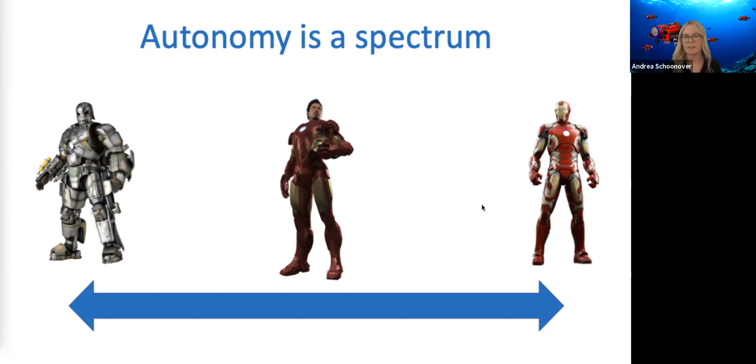If you take the leftmost suit and compare it to the rightmost suit, we could describe both of these robotic suits as having some level of autonomy, but they're across a spectrum representing that they're not capable of doing the same things on their own.

This begs the question: how do we give robots autonomy? First, we can look to ourselves to explore the ways in which we have autonomy. You and I, your teammates, we have autonomy because we have a brain to make decisions.

We also have eyes to help us see and ears to hear. We're able to take the knowledge we have about ourselves and about the systems that give us the capability to govern our own decisions, help us act, and give us capabilities on our own. We can explore other technologies that exist or need to be developed to help robots mimic these same functions.

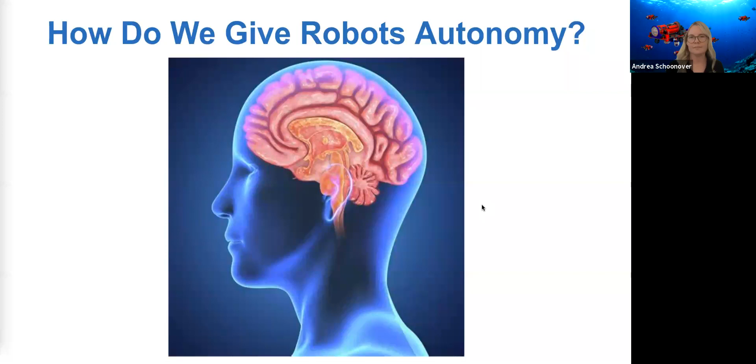If we want our robot to make decisions, we have to give it a brain, like shown on the right side of the screen. A robot uses a computer for its brain. The cerebellum is also part of our brain that helps us with posture and balance, just like a gyroscope would help a robot balance in the water.

So those are only some of the tools we use to give our submarine autonomy. The main point is that we can use sensors to help robots mimic human senses. Our sub is known as an AUV, an acronym for autonomous underwater vehicle. That means our robot is like a sub used in the water, not in the air or on the ground. When we put our robot into the water, we activate her program and she's able to navigate through the water by herself, without us having a controller.

Now, why do we care about underwater autonomy technology? Why does the world care, and why do we want to perfect it? People who are interested in these systems are rescue professionals, military, environmental conservationists, and explorers.

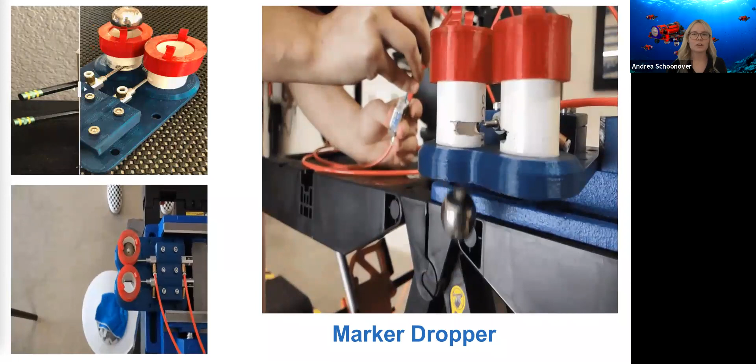When we design a new part for a robot, we go through a process similar to what you might have experienced in school or team projects. Before our official design is ready for our submarine, we first have to brainstorm the way we'd like to solve the problem at hand.

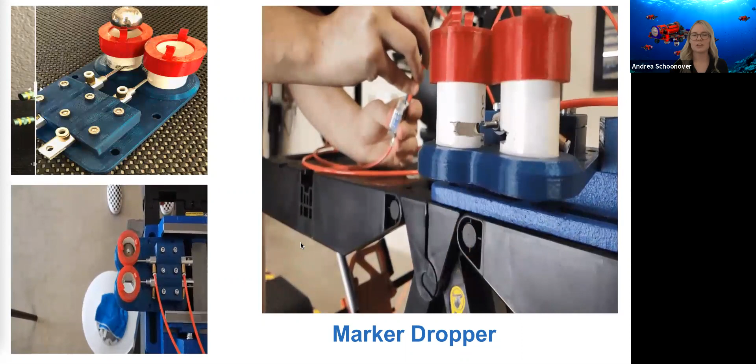After brainstorming, we find objects in our environment to create a prototype with. In this image, we've used a simple paper towel roll and pencils to prototype this marker dropper mechanism. Once we've created a prototype, before manufacturing, we like to come up with a version that's ready for testing.

For our purposes, that's actually a problem because we don't want the torpedo to float to the top as soon as it's released. We'd like it to travel in a straighter path so it glides through the water and reaches the target it's destined to hit.

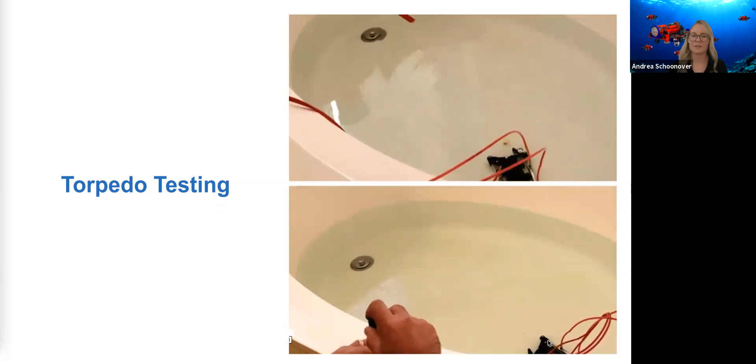Although our main focus is our technical project, Desert Wave is much more than that. We are role models for our community. We work with our little sister team, Da Geese of Freedom, a high school robotics team in the Chandler area.

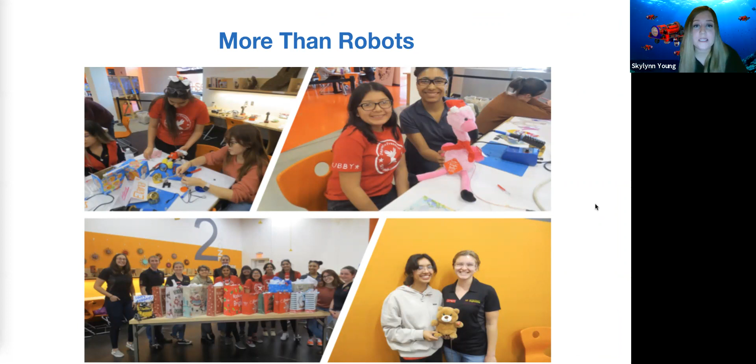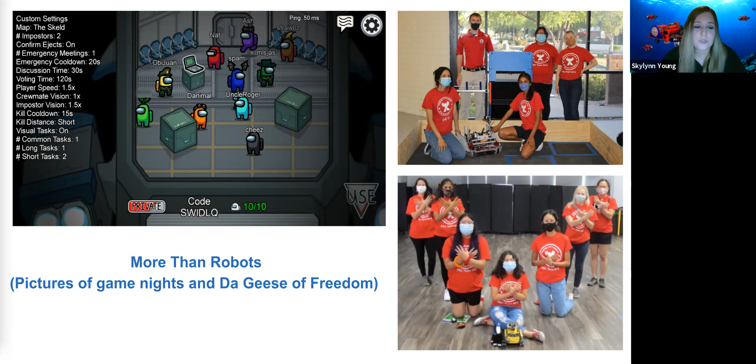As you can see in this slide, we have game nights, virtual game nights, where we come together and discuss our successes and love to share our stories with each other about our day.

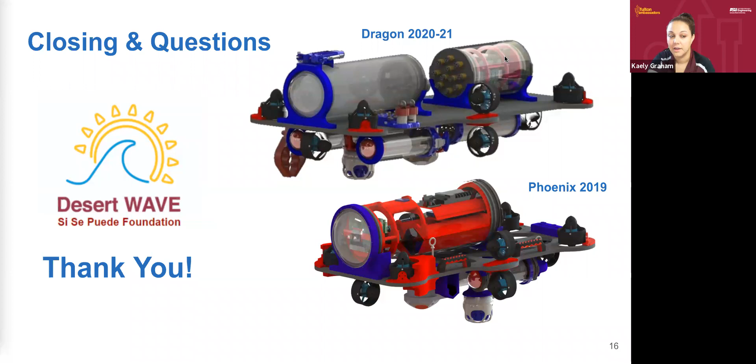Awesome. So there's some questions about the structure design of the robots. This first one asks: how much does it cost approximately to make one robot? And maybe you could talk about some of the tools or facilities you've used on campus to print, like 3D printing and things like that.

Yeah, that's a great question. It depends on the specifications you're trying to reach. This robot is quite expensive, but what really helps us bring the cost down is using processes like additive manufacturing or subtractive manufacturing, which is like 3D printing or using mills to take away pieces of the frame. Something we do that's very important within the engineering design process is that before you build, you try to create a prototype or use computer-aided programs to help create scale models of the things you'd like to produce.

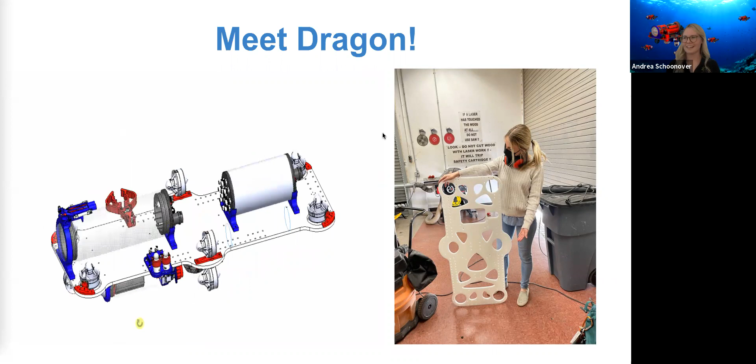If we can plan to the best of our ability what we'd like our robot to look like, as you can see on this computer program here, we can then take the material and use different machines available to us, like a CNC router. Actually, this frame is the frame for Dragon, and one of our new students was able to go down to the Innovation Hub on the Polytechnic campus, which is like a really awesome lab space filled with all of the great tools you could think of, and some I hadn't even heard of before, and get trained on how to use them.

This student was able to go down to the Polytechnic campus and use this incredible machine to essentially cut away the pieces from the material to create the design she had loaded in. We do similar things with all of these 3D printed pieces—we design it, and then we're able to use some of the machines to manufacture these pieces, so that we aren't having to order them from third-party companies. Designing some of these pieces in metal would change the weight of the robot, but also bring up the cost quite a lot.

Because we have access to 3D printers, we're able to use a material that's a bit more forgiving for students who are still in the learning process. So if we have to print this entire mechanism, or even just a small piece on it, it's not going to cost as much as it would to order it from someone who can manufacture it for us.

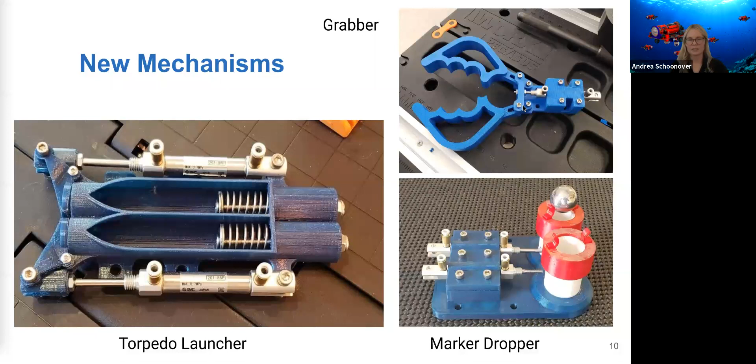I think that doesn't really answer your question on how much some of these pieces cost, but I'll give you an example. This Subsonus hydrophone array, these are hydrophones - it's what the robot uses to hear and communicate through signals underwater. A unit like this from a company can cost quite a lot, like I think this is $17,000, and maybe Dr. Frank can correct me, but we were very fortunate to have it donated to us, which helps with the cost.

However, using hydrophones isn't something brand new to this year. There's lots of research, tutorials, and resources that other people have documented from when they researched how to create a hydrophone. A robot like this is quite expensive for us, and we have two of them now, and we've been very successful with all these awesome sensors we have access to. However, just because you don't have the money or sponsorship to afford some of these pieces doesn't mean you can't create them yourselves - like this thruster. Off the shelf from a company, it could be a couple hundred dollars, but if you reverse engineer it and print some of the pieces yourself, it would bring down the cost quite a bit.

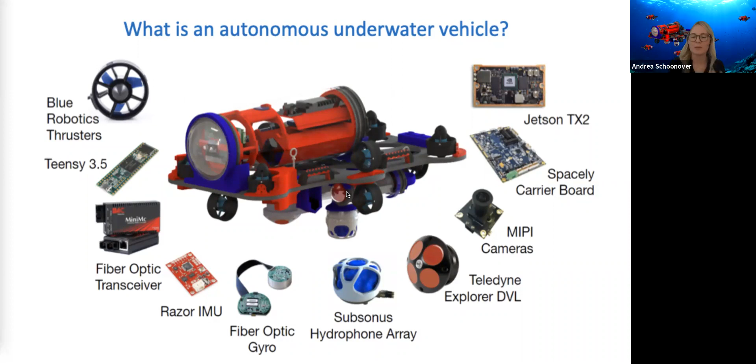I can answer that question. We use lithium batteries from a company called Blue Robotics. They actually sit right here - well, we don't have batteries on here right now, it's a power source. They're batteries that sit inside what we call battery pods, these acrylic tubes - maybe you can see it better here. They're 12 volt... I don't know, Dr. Frank, could you clarify that?

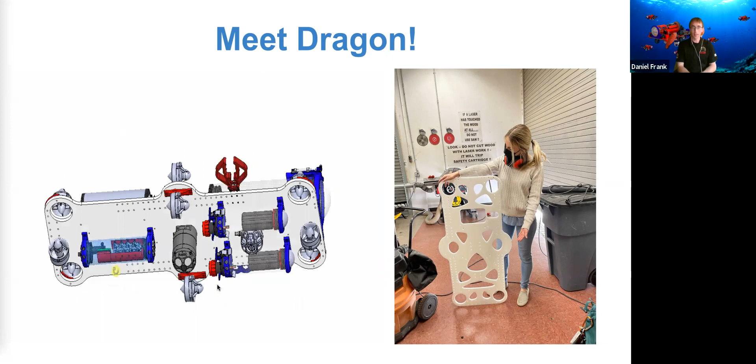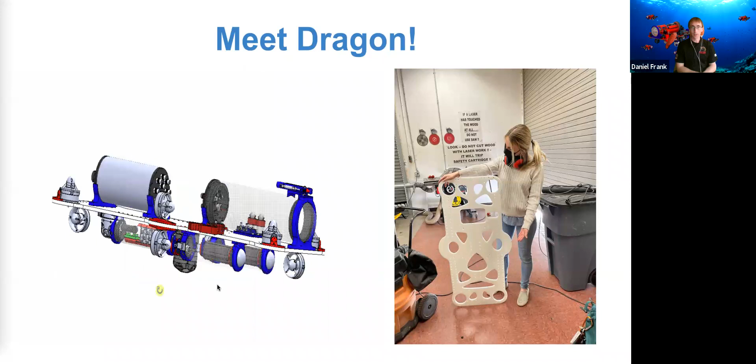Yeah, I think they might be 16 volt. They're lithium polymer. As far as how long they'll run, it depends what the robot's doing. Sometimes when testing, the robot just sits in the water staring at things, collecting data from the cameras, so it won't use a lot of power. But sometimes the submarine's driving all over the pool, going fast, doing turns, going up and down - if it's really active like that, probably about 20 to 30 minutes before we have to pull it in to change the batteries. But if we're just testing and it's sitting there for a while, usually 2 or 3 hours is good.

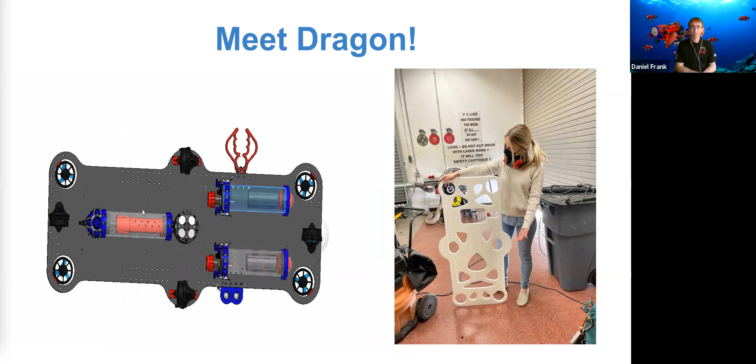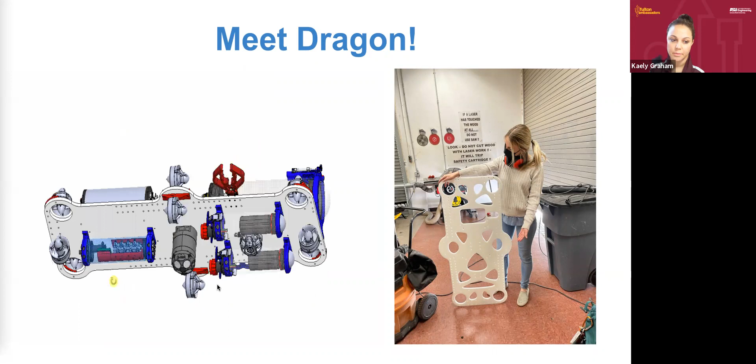There's another question asking, do you plan on using this vehicle, or could this robot or something similar be used to solve real world problems, and what type of applications could this have?

Just like what we were talking about for what AUVs are used for, this is the kind of thing we're researching, and it needs to start developing further so we can explore the ocean more. Only 5% of our ocean has actually been discovered today. When you work with AUVs, we're trying to improve search and rescue, mapping the seafloor, and underwater inspections. I was in the military, and a lot of naval divers actually use this or something like it. So it's very important not only for civilian life but for military life, for discoveries as well as protection.

Do we have any other questions? There's a comment saying this is so cool, and it is so cool. We're always so impressed with everything our students are doing. While we see if there are more questions coming in, I wanted to ask if you ladies wanted to give any advice. All these students have their competition coming up this weekend. As a competition team, do you have any advice for them as they're getting ready to compete in the National Science Olympiad?

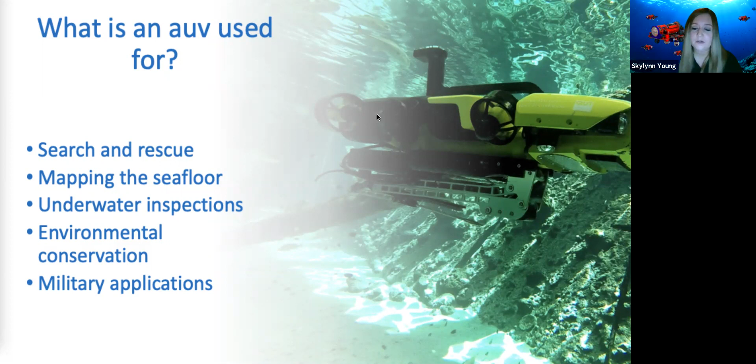I didn't get a lot of these opportunities that you guys are getting in middle school and high school. My school didn't have anything higher than a calculus class. We didn't have physics, we had nothing for engineering. So my advice is probably to do as much as you can and have fun. A lot of these opportunities will just help you excel in college. That hands-on experience is what you want, because you can learn math, you can learn science, you can learn it all, but until you do hands-on experience, you're not really going to understand what you're learning. That's my personal preference.

Awesome, we have a question. Oh sorry, Dan, do you have advice? Oh, go for it, Dr. Frank. Oh, yeah.

Skylynn, did you ever have an opportunity to do anything like they're doing with the Science Olympiad when you were in high school? No, the most we ever got was a math competition, maybe testing how much science we knew, but as far as anything you guys are doing, I never had that opportunity. I graduated in 2011, so that wasn't really open for me personally. That's definitely why I'm saying go out and do as much as you can, because this experience will help you throughout college. I didn't know I liked engineering until I went into the military and worked on diesel engines and gas turbines on a ship, and that's when I fell in love with it. So definitely take all the opportunities you can in middle school and high school.

And just adding to that, like Skylynn, you didn't have these opportunities.

Andrea, I don't think you had opportunities like that in high school. I know that I didn't. So if you think what they're working on is cool, imagine the stuff you're going to be able to do when you're in college, because you're going to have all that additional experience. Like when I went into engineering, I knew nothing about engineering when I started my freshman year in college.